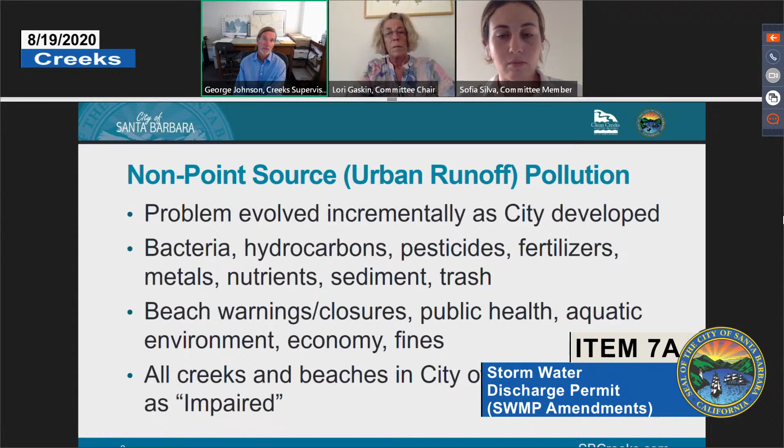There are potential public health issues, it definitely impacts the aquatic environment, and impacts to tourism when the beaches are closed or where there's warnings are a potential result, as well as regulatory fines for exceeding the pollutant standards. Right now, all the creeks and beaches in the city of Santa Barbara are designated as impaired, and what that means is they exceed federal standards for recreational contact and for the aquatic environment. So that's where we really exceed.

We have a stormwater management program that is a requirement of the Central Coast Regional Water Quality Control Board. And the Central Coast Regional Water Quality Control Board basically implements the Federal Clean Water Act for the state in our area. And so one of their requirements is that we have a stormwater management program to try to improve water quality over time within the city. That program has been in place since 2008.

It requires things such as inspection and enforcement of illicit discharges and dumping, outreach and education, water quality monitoring and research. And what we're going to be talking about today is part of that stormwater management program, which is the requirement that development capture and treat stormwater, and this is referred to as post-construction requirements, or PCRs.

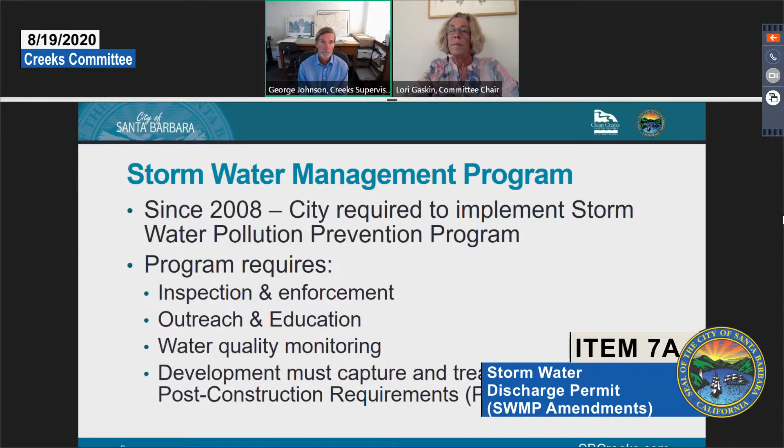Next slide, please. So post-construction requirements, in general, are an important tool for creek and ocean water quality. The problem, as I described before, was created incrementally as the city urbanized in this area, and it's going to be solved incrementally through redevelopment. We do have successful ways to build now that don't create polluted runoff. And so the idea is that as the city redevelops, it will implement those new approaches to treating stormwater on site, and that eventually the water will get cleaned up.

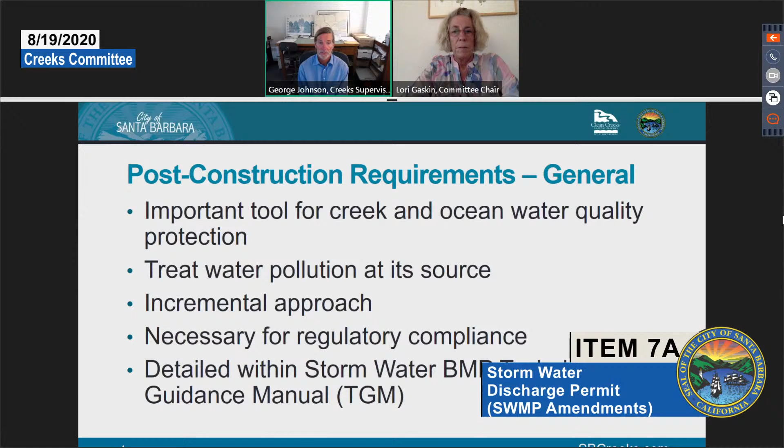And so these requirements basically require development projects to do that, and it is an important tool for us in the long term to improve creek and ocean water quality. It has the advantage of treating it at its source, and it's nice because it's not a requirement that the whole city has to do at once. It's based on redevelopment, and that's slower, and so it is not as burdensome to the community because it happens at a more measured pace. It is also necessary for regulatory compliance.

As I said, the Regional Water Quality Control Board requires us to have these post-construction rules in place. And all these rules or requirements are detailed in what's called the city's Stormwater BMP Technical Guidance Manual, or TGM for short. Next slide, please.

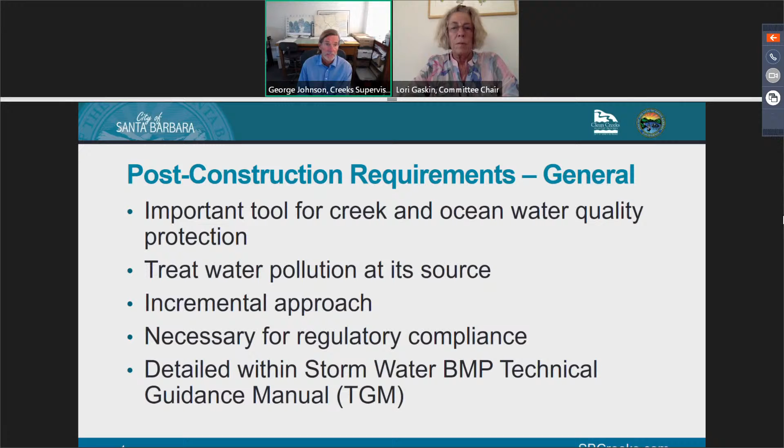The Technical Guidance Manual defines the PCRs, or these post-construction requirements. It's a 400+ page document. The PCRs, or the actual requirements, are a small portion of it. Most of it is the technical assistance that provides guidance on how to comply with the requirements.

It was created in 2008 by Geosyntec Consultants. At that time, it had extensive public review, including all the city's design review boards and a bunch of the city departments and staff, as well as stakeholders. It's been in place since 2008, but it was adopted into the city's Municipal Code in 2013 by the City Council, and then it was approved in the city's updated local coastal plan in 2019. Next slide.

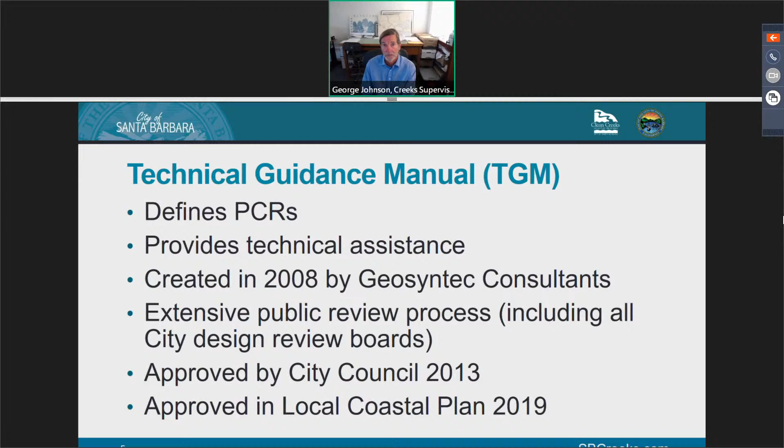So we've gone over some of the background, but what we're focusing in on today is that city staff, working with the development community, the environmental community and other departments within the city, has started a process to amend the city's technical guidance manual. It's been in place for about 10 years, and there were some areas that we saw, as well as the development community, to improve. Now, the goal was to make it more fair, more flexible, and more effective, but at the same time to try to balance water quality treatment.

We wanted to keep the same water quality treatment we have with the existing regulations as with these new requirements in the city's technical guidance manual. So really, we're trying to balance what we have already and make some improvements so that it is more fair and flexible, but that we still get the same improvements to water quality.

Next slide, please. It requires an amendment to the city's stormwater management permit. It requires an amendment to the municipal code, as well as the local coastal plan. So it's a pretty long administrative process. First, after the CAC provides recommendations, we'll be going to city council.

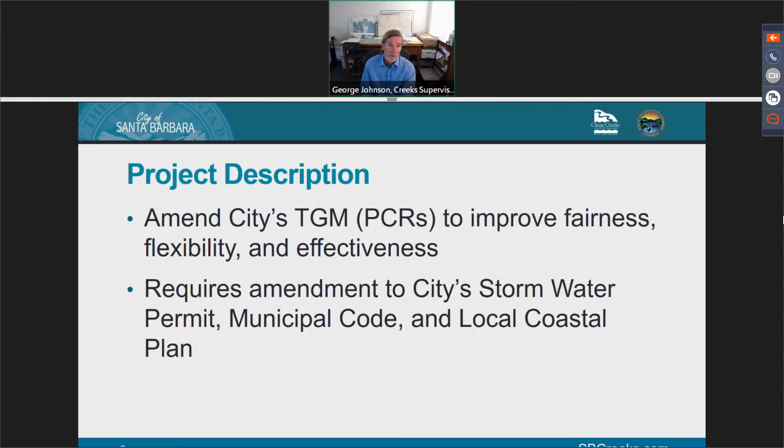So we want to go over this amendment process, what we've been going through in the last 18 months to make amendments to the technical guidance manual or PCRs. And it first started back in late 2018. We met with council members, design professionals, environmental organizations to get input on ways we could improve the manual. We hired a technical consultant, Geosyntec, the people that wrote the manual originally, to help us with some more of the technical components of the manual. We got the rest of the departments in the city to assist us also with the revisions.

And then throughout 2019, we worked with the design community and environmental community through letters and meetings and emails to incorporate their concerns in the amended document. We came up with the amendments and posted the revised technical guidance manual at the beginning of 2020, February 2020. We then held 2 public meetings in March of 2020 to discuss the amendments. And then we recently had a planning commission hearing on July 23rd to also discuss the amendments and get recommendations from the planning commission.

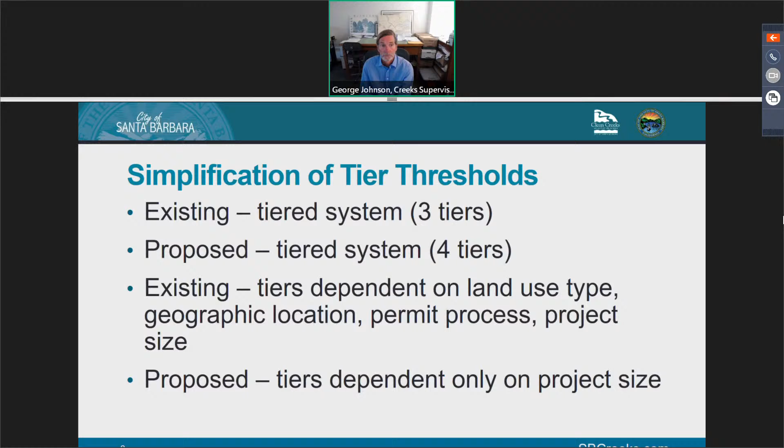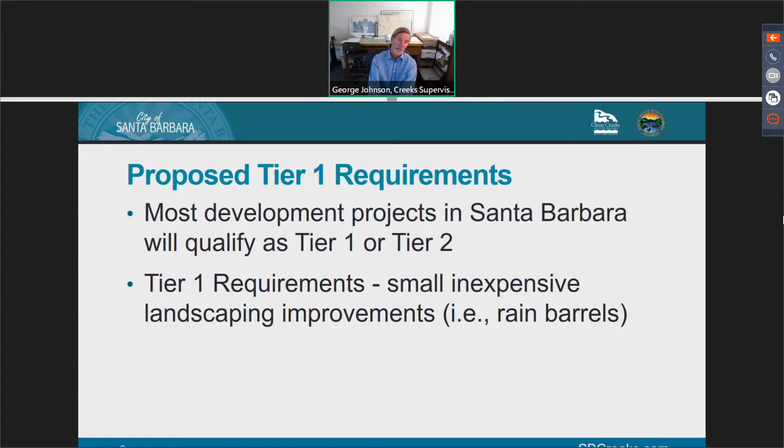So proposed tier 1, we'll go over these proposed requirements right now. The tier 1 requirements are very simple. They're for projects that are anywhere from 0 to 499 square feet. And they require you to do small and inexpensive landscaping improvements such as rain barrels. We want to point out that most development projects in Santa Barbara will qualify as either tier 1 or tier 2 requirements. Next slide, please.

Tier 2 requirements are a little different than the current tier 2 requirements. They require volumetric treatment, and these apply to projects that are anywhere from 500 square feet to 1,999 square feet. Volumetric treatment means that you have to treat a certain amount of runoff coming off of the development or the property. And in the case of tier 2 projects, the treatment is only for impervious areas that are new or replaced on the parcel, not the existing impervious areas on the parcel, but only new or replaced.

In tier 3, you have to treat the entire parcel or all the impervious area on the parcel. The other major difference in tier 2 is you can treat any portion of the impervious area that you choose, and we'll go over that and explain that a little more later.

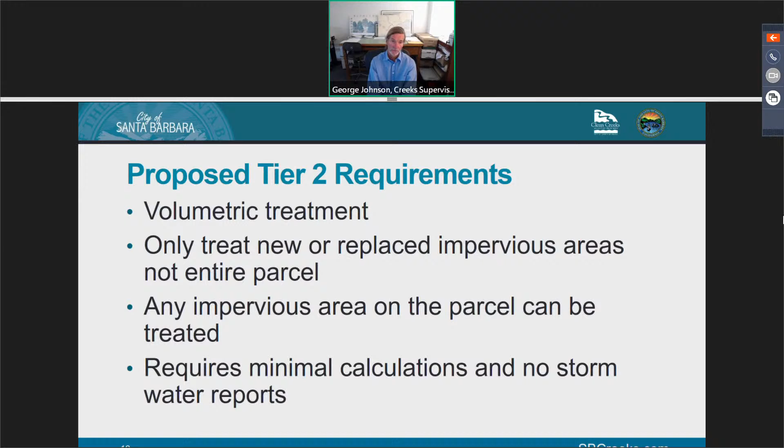It requires minimal calculations and no stormwater reports, and the volumetric treatment is a 1-inch storm event, so you have to treat the volume of water for a 1-inch storm event. That's because about 80% of the storms that come through Santa Barbara are 1 inch or less in size. And so that type of treatment ends up preventing polluted water in most rain events from getting into our creeks and oceans.

So next slide, please. Proposed Tier 3 requirements also treat the 1-inch storm event, but in these projects, you have to treat the entire parcel. Now, the tier threshold is being changed for Tier 3. It's currently at 500 square feet for a large portion of the city. It's now being moved up to 2,000 square feet. The requirements themselves for Tier 3 are not substantially different. You treat the entire parcel.

One big difference that we've included to try to incorporate some flexibility is the 95% rule. In other words, right now, you have to treat 100% of the impervious area on the parcel, and sometimes that can be difficult with small areas on the parcel due to unusual grade or just their location. In the proposal, you'd only have to treat 95% of the impervious area. So that allows people a little flexibility in meeting the Tier 3 requirements.

We want to recognize that by raising the threshold, that will reduce the amount of water treated as part of the program. But as we said, we tried to carefully balance the treatment between the existing requirements and the proposed requirements. In order to balance that so that we get the same level of water quality, we've included Tier 4 as a way to increase the amount of water treated so that we're in rough approximation with the current existing program. Next slide, please.

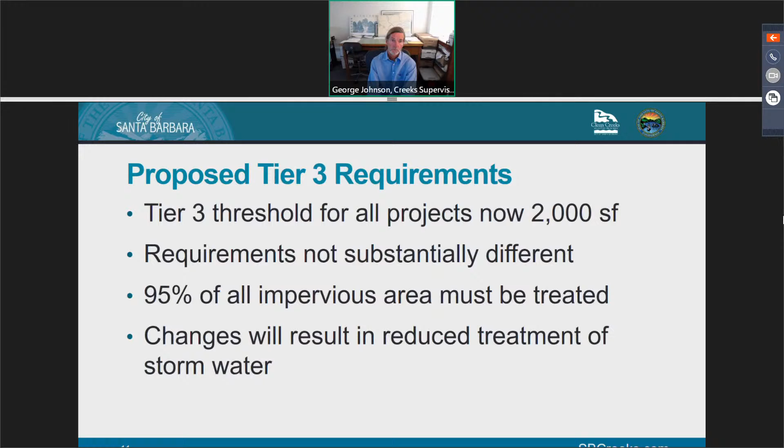You can see in this map, this is the existing Tier 3 requirements. Everywhere in red, it's 500 square feet. In Tier 3, we're proposing to raise the thresholds from 500 square feet to 2,000 square feet. Right now in those areas in red, if you have a project that's over 500 square feet, and those are the hillside design districts, the commercial districts, and the coastal zone, you are required to meet the Tier 3 requirements.

If you're in the blue area on the map and you have a project, the threshold for the Tier 3 requirements is 4,000 square feet. So in order to improve the fairness of the system, we are proposing that we have the same development size requirement for the entire city.

One thing to point out is that in those blue areas, most of those are residential areas with more landscaping, and they tend to be flatter than the other parts of the city in red. So those actually are easier to treat, and they tend to be more effective because you have larger areas of landscape, and typically most of the BMPs are done in the landscaped area. So we do think we'll get more effective treatment in those blue areas, and it will be less expensive typically for the applicant. Next slide.

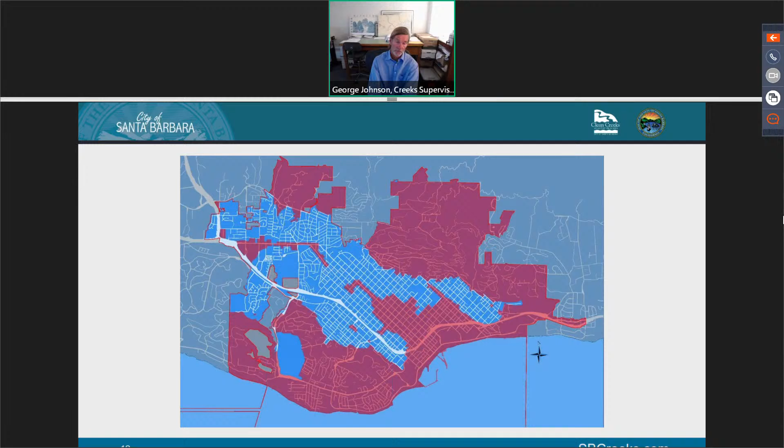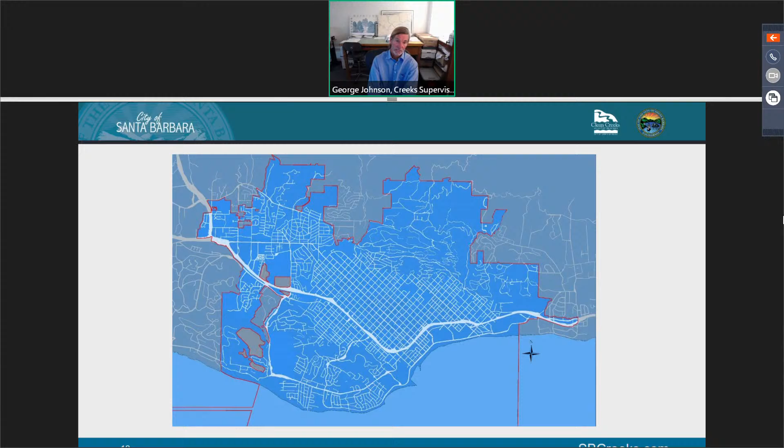So the proposal is to make the entire city all the same for Tier 3. You can see that the entire city is all now blue, and that requirement, again, is 2,000 square feet for Tier 3. Right now, it is 500 square feet in the red areas and 4,000 in the blue areas. To make it consistent and more fair throughout the city, the proposal is to change that to 2,000 square feet for a Tier 3 threshold for the entire city. Next slide.

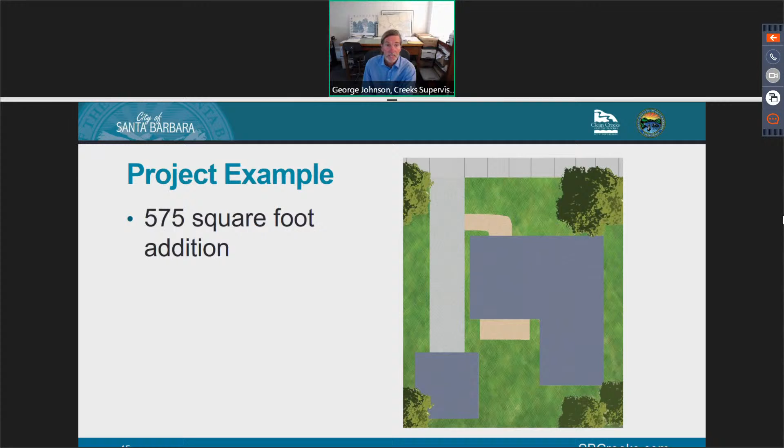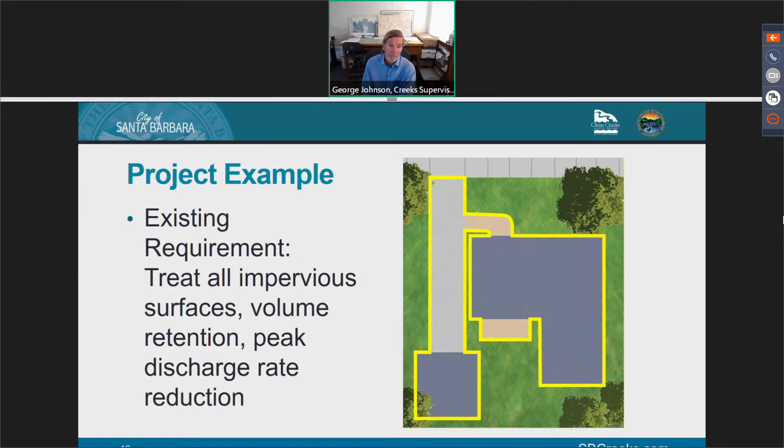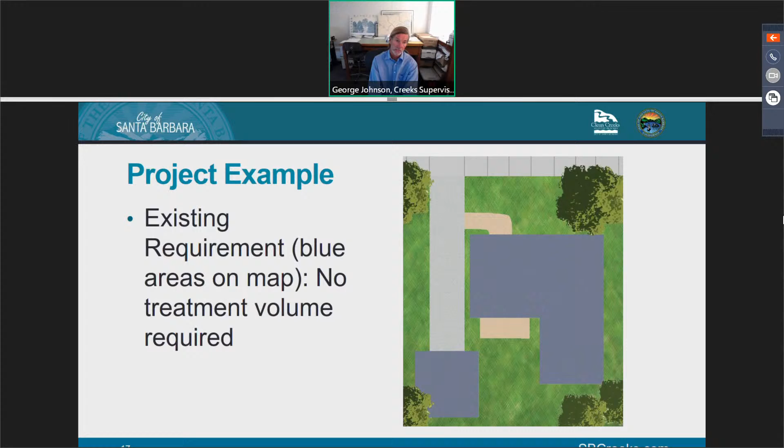Here's an example of an existing home. Next slide. This is for existing Tier 3 requirements. You do a 575 square foot addition. Next slide, please. If you're in the areas in red on the map currently, you would have to treat all the hardscape on your parcel. Next slide, please. If you were in the blue area, then you wouldn't have to treat anything on your parcel because your development is only 575 square feet, so it does not meet that large 4,000 square foot threshold. Next slide. Now we're going to use this same schematic to go over the proposed Tier 2 requirements.

We talked about that they're required for 500 size projects. Tier 3 is 2,000 or over. Tier 2 is 500 to 1,999.

So for a Tier 2 project, if you were to propose a 575 square foot addition, as in this example, you would only treat that 575 square feet of new or replaced impervious area.

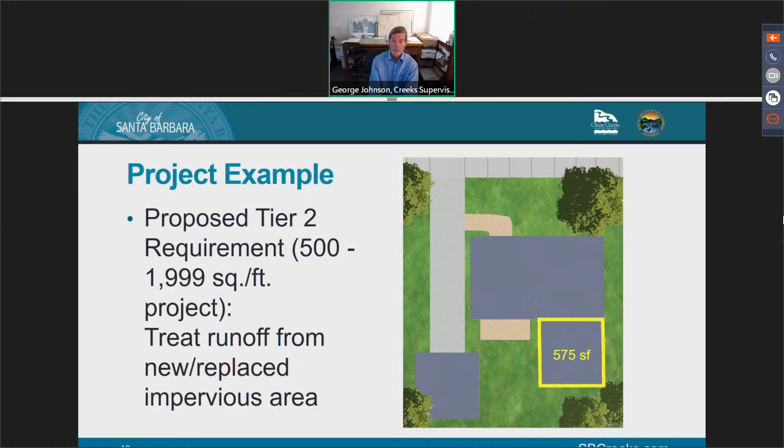Next slide. And in this case, that's what you would treat right there. So you could treat the actual water coming off of the addition itself, or off of the garage. The point here is that you have to treat only the square footage in Tier 2 projects of the area that is your new and replaced impervious area.

So if it was easier for you to use the garage and you could get better treatment or less expensive, you could do it on the garage. You might choose to do it on the front of the house, or on the driveway. It's up to the applicant, but it provides a lot more flexibility because they can do the treatment wherever it works best on their parcel. They just have to do an equal size of treatment to what they are developing.

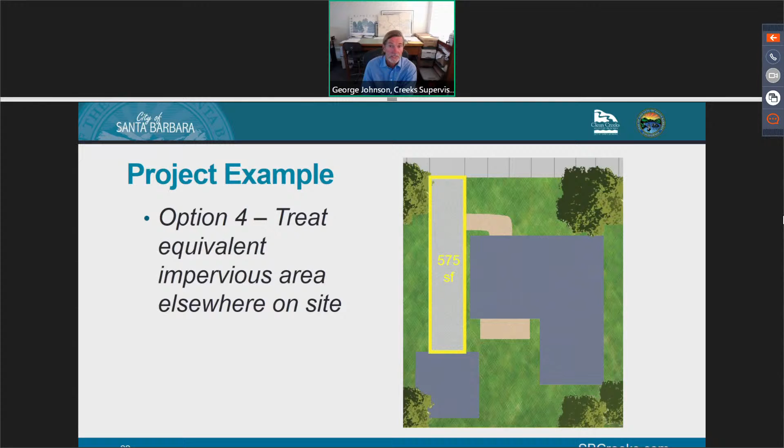The proposed Tier 4 requirements that I mentioned earlier apply to large development projects of 15,000 square feet or larger. Typically in the city, we see about 2 or 3 of these a year. So there aren't a lot of these projects, but they do cover large areas and, if untreated, contribute a lot of potentially polluted water to the system.

So the proposed requirements are to retain 1.2 inches of runoff. I spoke about this earlier - Tier 3 and Tier 2 treat 1 inch of runoff from impervious areas. For Tier 4, that's raised to 1.2 inches, and you need to retain that water on site, for all areas that have existing impervious surfaces. For those areas that are vacant or landscaped on your lot, the requirement goes up to 2.4 inches. This is consistent with the city Central Coast PCR requirements.

And again, these higher requirements for Tier 4 offset the higher Tier 3 threshold.

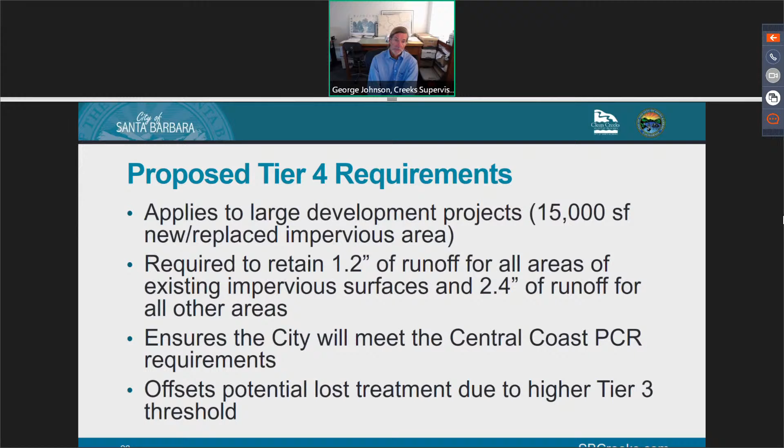So next slide. Here's an example of a Tier 4 project, maybe typical for a downtown area where you have about 90% of the lot covered in impervious surfaces and a little bit of landscaping.

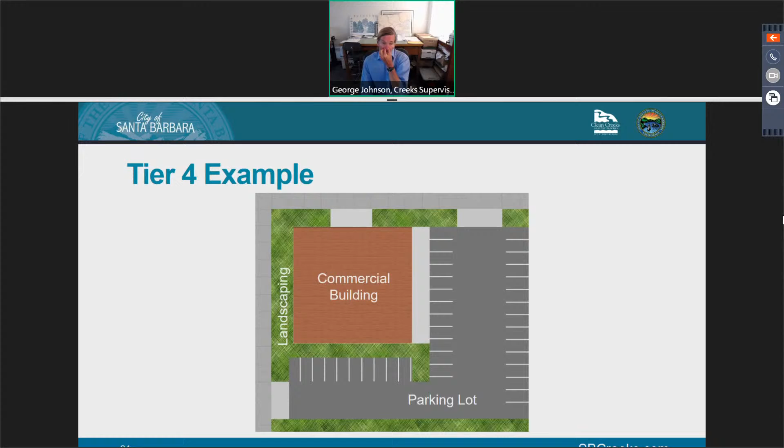Next slide, please. If you were to take that parcel we just saw and redevelop it, covering the entire site lot line to lot line with impervious surfaces like parking lots, buildings, and driveways, this is an example of what you'd be required to do. So for all the blue areas, you would have to retain 1.2 inches of rainfall for that square footage of the area.

And then for the yellow areas, you would have to retain 2.4 inches of runoff. So that's the difference - the yellow areas are smaller, but they're a higher requirement. If you didn't develop the entire lot and left those areas landscaped, you would just have to do the 1.2 requirement for your redeveloped area.

But again, if you cover the areas that are currently pervious with new development, then you will have to treat a higher volume of water for the square footage of those vacant areas.

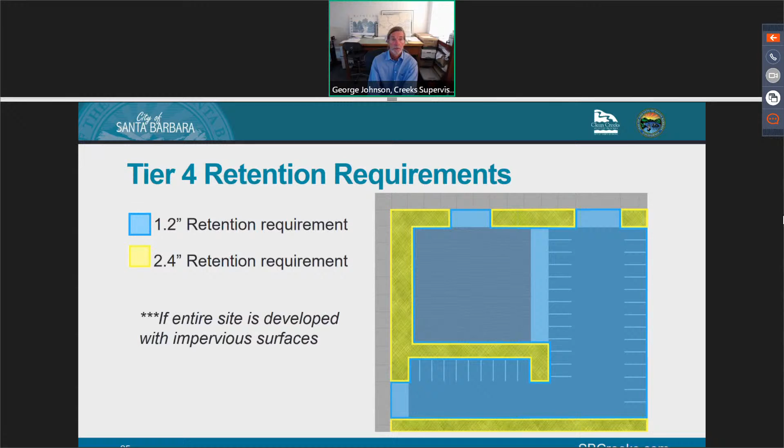As I said, there were kind of three things that were changed: the formatting of the technical guidance manual, the tiers, and some requirements for the tiers, and then the exemptions.

And so we did make quite a few changes to the exemptions. There are a total of 23 exemptions. We changed the maintenance and repair exemptions, included re-roofing projects as part of the exemptions, driveways over 15% slopes, shared driveways, and minor work in the public right-of-way.

We do want to mention that we're still working with city staff on some minor tweaks to the language in the work in the public right-of-way exemption, but we will have that completed prior to going to city council.

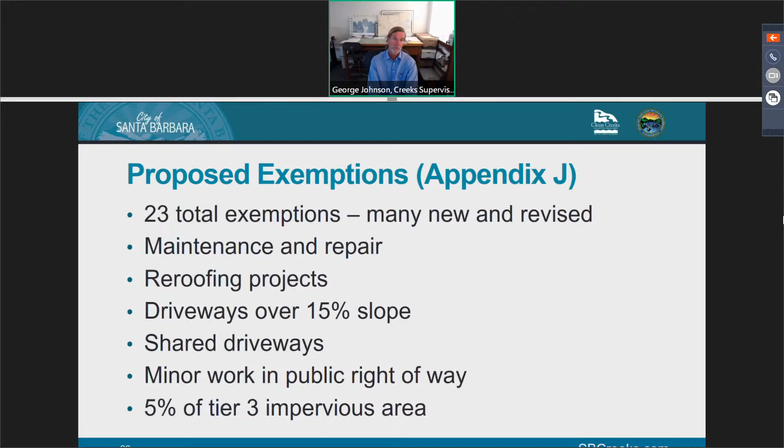And then the last exemption is that 5% of the Tier 3 impervious area I mentioned earlier, or put the opposite way, you only have to treat 95% of the lot rather than the whole 100%. So it gives you an exemption for 5% of the area.

When we worked with the development community extensively on these amendments, we were able to include most of their requests in the proposed amendments you're hearing right now. But there were some additional comments provided by the development community prior to our scheduled planning commission hearing that was going to occur back in April of 2020. We delayed that until July so we could investigate and address some of these comments. We're going to discuss each of these comments, as there's 5 different ones, as we go through. You'll see what they are, and we'll discuss each one in detail.

The first request was that we have proposed to increase the tier 3 threshold from 500 to 2,000 square feet, and their request was to increase that even more to 2,500 square feet. We chose 2,000 square feet because that's where we could balance and maintain the same level of water quality treatment for the existing program as the proposed program. Also, 2,000 square feet is a pretty big project, about $1 million, so we were trying in the design of these tiers to make things proportional. A small project under 500 square feet, you don't have to do very much. Small to medium, 500 to 2,000 square feet, you have to do a little more. After 2,000 square feet you do more for tier 3, and then tier 4 you even do more. So it's proportional to the size of the project.

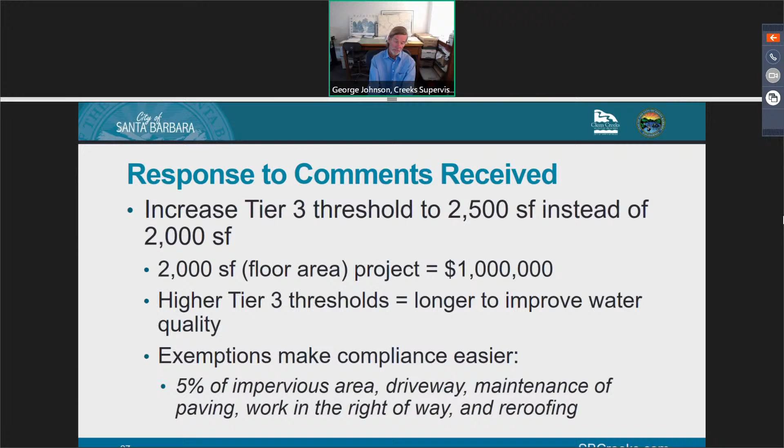We want to point out that we did include some exemptions that make it easier for tier 3, such as the 5% impervious area exemption, as well as some other exemptions that help projects either get under the threshold or have reduced requirements for treatment if they do go over the threshold.

The second comment was to exclude State Street and downtown from tier 4 requirements. This comment was made prior to a change that staff made after we received it. We went back and looked at the tier 4 requirements and found out that the regional board actually had a clause that allowed for this. Our original proposal was that anything over 15,000 square feet in the tier 4 category would have to retain a 2.4 inch rain event, and that's quite a bit of water. The development community was worried, especially in the downtown area, as to how they would do that.

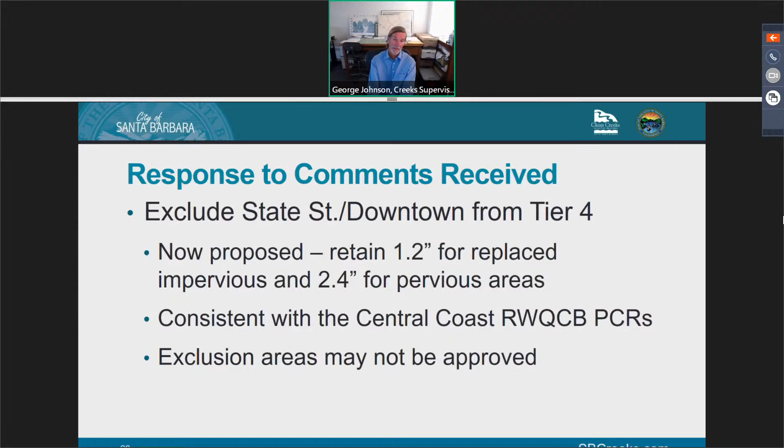So we went back and were able to revise it, consistent with the regional board's PCRs, and that only requires 1.2 inch retention for the impervious areas. Because in the downtown area most of the lots are developed with impervious surfaces, either parking, alleyways, walkways, or buildings themselves, for most of those projects the treatment requirement will only be 1.2 inch retention. That's a little bit more than tier 3, but again it's part of that proportional treatment. As you get larger, you do more treatment, and it helps us balance and maintain our water quality protection.

We also included a waiver process. They requested inclusion of a waiver process, and we currently do have one in our program, which can be used for technical or legal infeasibility. The regional board actually doesn't have a waiver process in their PCRs, so this is actually better than their system for applicants, because the waivers don't let you completely get out of the requirements for water quality treatment, but we can waive a portion of those requirements. That's advantageous, because under the regional board's regulations, if you don't do treatment on your site, you're required to demonstrate compliance offsite, which can be very expensive and administratively difficult. So we think our current waiver process is a good one, and at this point we don't recommend making any changes to it.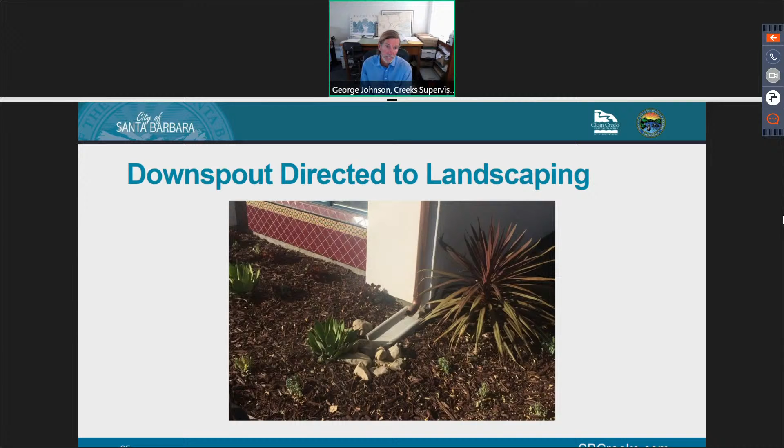The next one is similar to that. It's a flow spreader where you try to spread the flow out from your downspouts throughout your landscaped area.

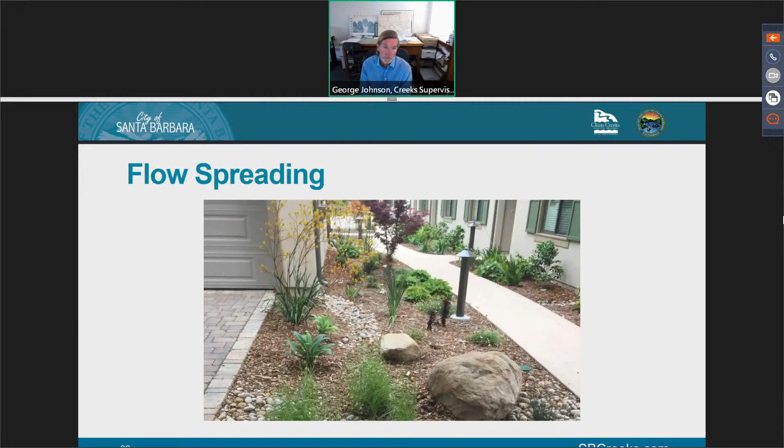Similar to that is a rainwater garden, but it's a little larger.

Rain barrels are pretty inexpensive ways that you can help treat some of the stormwater from your site.

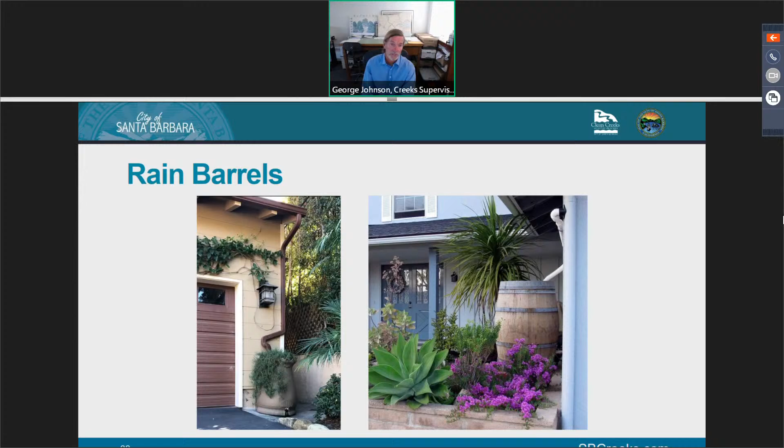Above ground cisterns can be used in areas where you have constrained sites or where you can't infiltrate water. Even plant-contained planters can help treat water.

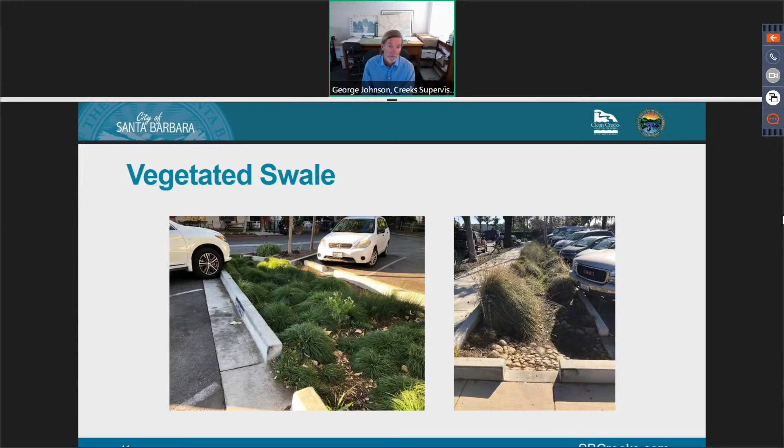Vegetated swales, used in parking lots. Same thing with roadside swales, a very similar technology or technique.

You can have bioretention basins. Those are kind of depressed areas that water flows from parking lots or hardscape to.

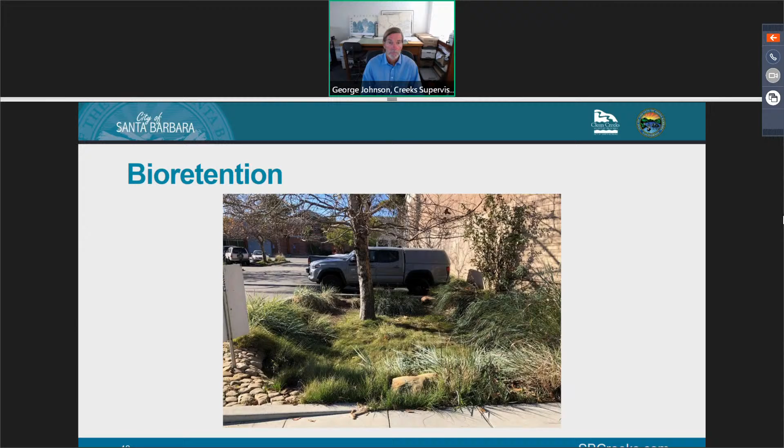Infiltration basins are a larger version of that. And then planter boxes.

Green roofs, and dry extended detention basins. This is another technique, a little different landscape look.

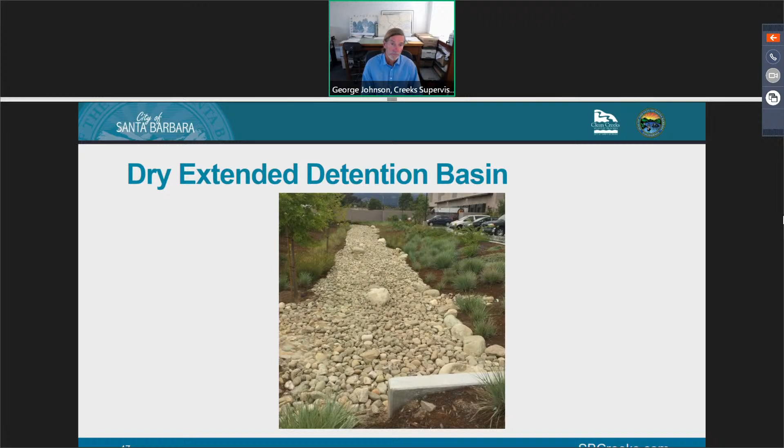And then wet retention basins. That's where they're wet all the time and they retain all the water that flows on.

And then ribbon driveways help treat water and infiltrate. Same thing with permeable asphalt and concrete.

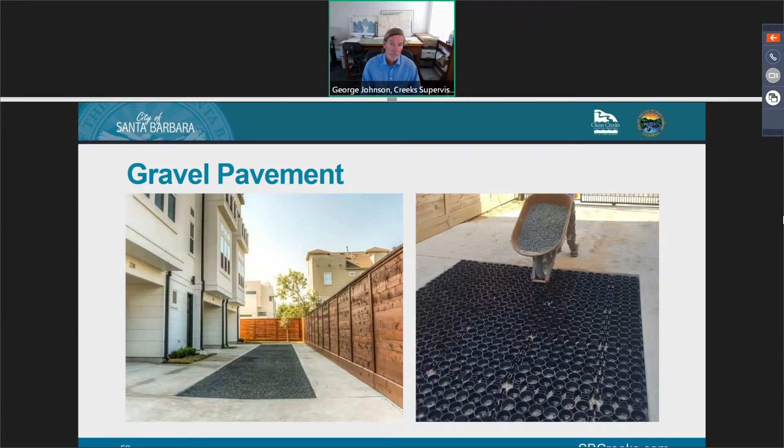Grass pavers, same kind of idea with a different look, different materials. Gravel, same thing. And then permeable pavers, which most people are familiar with.

So that concludes my presentation. We're available for questions.

George, thank you so much. I think I speak for all the members—that was very thorough, well-organized, and an excellent presentation. I thank you for the time and effort you put into that, and I particularly appreciate the latter part where you demonstrated the permissible ways to capture, treat, or retain water on site. So thank you.

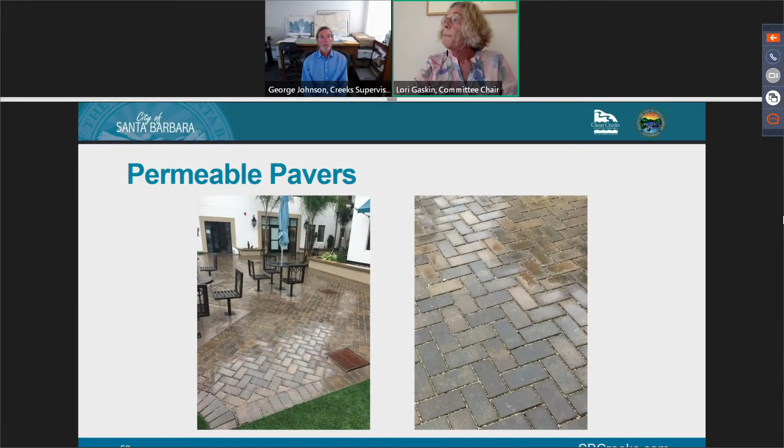Committee members, are there any questions? If you could unmute your mic if you have a question. Any questions? I don't see any. I would like to make a comment.

I very much appreciate the work that the Creeks Division has done over this decade to really focus in on stormwater quality and to positively impact the outcome of that to the benefit of the entire community. We annually receive reports about stormwater quality and the progress we're making, and these regulations and measures seem to consistently and formidably help us in this regard. I personally think the refined thresholds are very attuned to the reality on the ground, and I appreciate staff's focus on that.

Particularly the refinement in Tier 2 and Tier 3, I appreciate the alignment with project size. It makes a lot of sense when you're putting something on the ground that it's related to something as tangible as project size and not a compilation or amalgamation of a calculus. And then finally, I think it's a well thought out and well reasoned approach to providing necessary revisions and updates to the process. So I appreciate staff's thoughtful approach to this. Thank you.